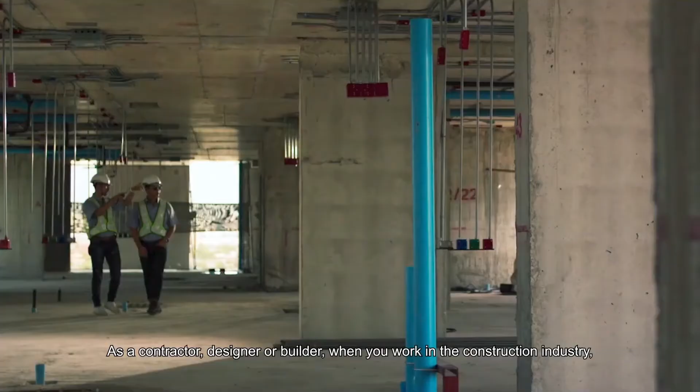When you look at the buildings that exist in today's world, what do you really see? The concrete, the stone, or a reflection of yourself? As a contractor, designer, or builder, when you work in the construction industry, you know you're out there creating something each and every day. Have you ever considered the influence your building is bringing to the people living there? Throughout the past several years, people have simply considered builders as carvers of stone, erectors of columns, or cutters of pieces of stained glass. But they are so much more than that.

Buildings affect the way we live our lives. They inspire us and help us decide where to live, how to live, and in some respects, they reflect who we are as a society. We shape buildings from the beginning. Thereafter, they shape us.

No one can deny that the impact of technology on architecture reflects every aspect of our lives. In this new digital era, we can rely on our past experiences while still starting to look at the world in a totally different way. We start to explore the way to better run a project, better use energy, better focus on design to create an interactive living environment, and better work with the creative path of prosperity for more people.

If you want to explore what the future will be like, come and join us for our Summer Summit. Share your passion for construction and get insight into the digital world. Because a better world starts here, with you.

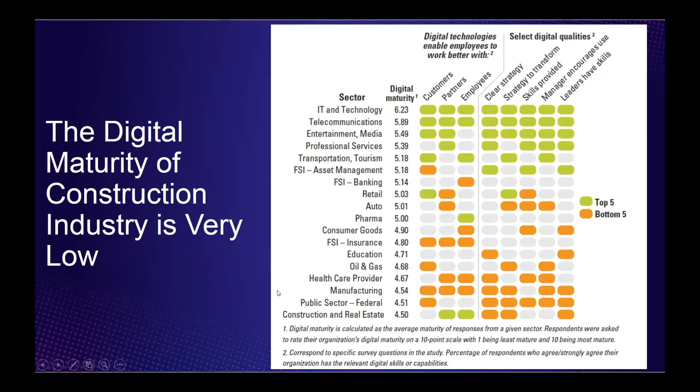That's a good question. Let's take a look at the other part of the survey.

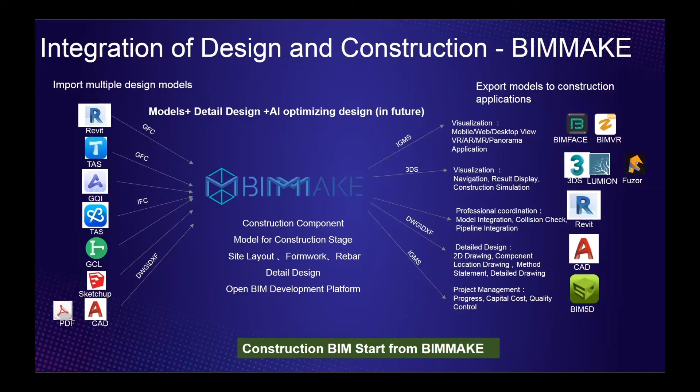So how could BIMMake play this role? Let's take a look at the architecture of BIMMake. For the platform level, BIMMake has BIM data standards, a graphics platform, and a BIM core modeling platform. For components, there are some very key components such as file import, file export, modeling for structure and architecture, model visualization, site modeling, and so on.

Based on this platform and these components, BIMMake has solutions for integrated steelwork, visualization and simulation of construction methods, and takeoff during construction. If we have complete construction models, that means we can get very accurate quantities of the building for each floor. Based on the quantities, we can make a reasonable plan for material, for people, and for machines.

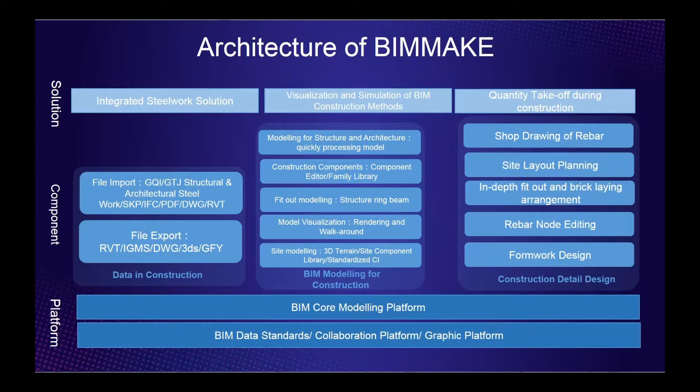So the second important thing is integration of project management and enterprise management into one system. For site management, we know there are some key elements, such as labor management, machinery, material management, methodology, and environment management. If we have digital technologies that can dynamically get the information of labor, machine, material, methodology, and environment, that means we can make a project management system that can easily and quickly get risk information, quality information, and progress information.

And if we have all of this information in real time, we can also transfer this information to the company level for the whole company, and we can have some program library and plan library.

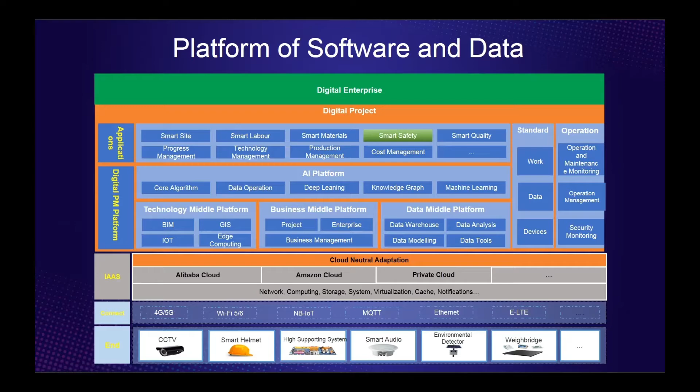For these new technologies, new platform, new methodologies, we have already used them for many projects. This is one sample project. The total construction area of this sample project is 150,000 square meters, 216 meters high.

We have every safety and quality issue in the data, in the system, so we can track the change of the data. This project has used our software for reporting, recording, and tracing the corrective action of construction quality and safety problems. The project manager told us this software doubles the efficiency of quality and safety management in this project compared to others.

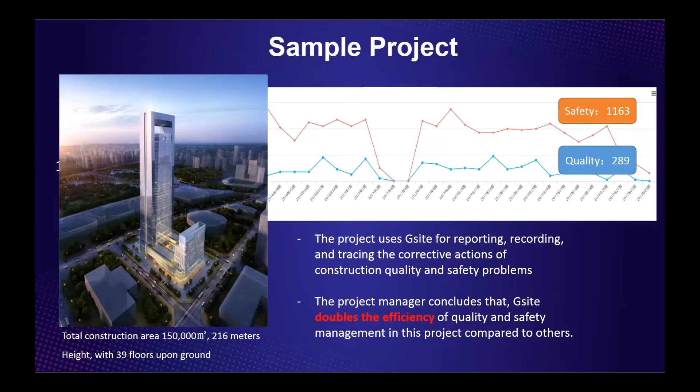The safety issues numbered 1,163, quality issues 289. This project involves 11 subcontractors and 47 users. So far, 91% of issues closed, and 80% of issues solved.

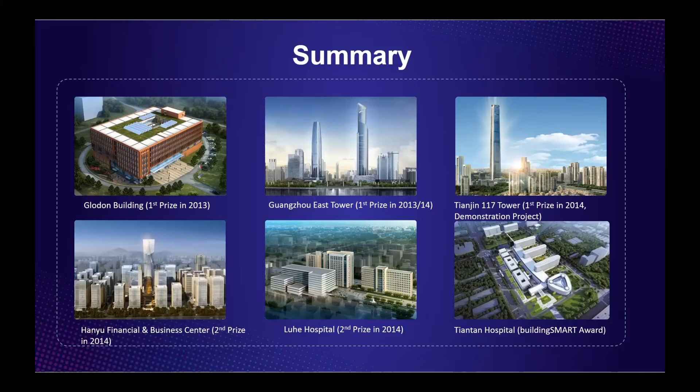Besides this sample project, our system has already been used for many other projects, such as our own Glodon office building, Guangzhou East Tower, the highest building in Guangzhou, the Tianjin 117 Tower, and a local hospital. This system has already been used for more than 20,000 projects, including houses, high buildings, airports, and others.

Digital transformation is not easy, but it's feasible. If we think of it as a system transformation, we need digital leadership. We need to figure out the strategy and use a digital building strategy to guide the transformation for our company. We focus on 3 parts: integrate design and construction to one system, integrate project management and enterprise management to one system, and integrate software and data to one platform. Based on this leadership strategy and key methods, we think digital transformation is achievable.

With intelligent architectural ideas, we are changing traditional concepts and redefining the relationship between human beings and buildings, creating intelligent cities.

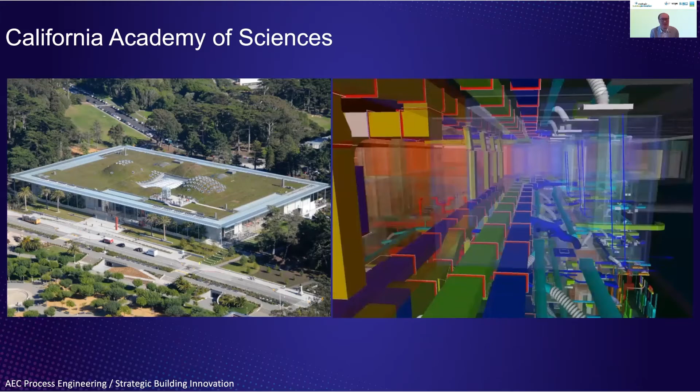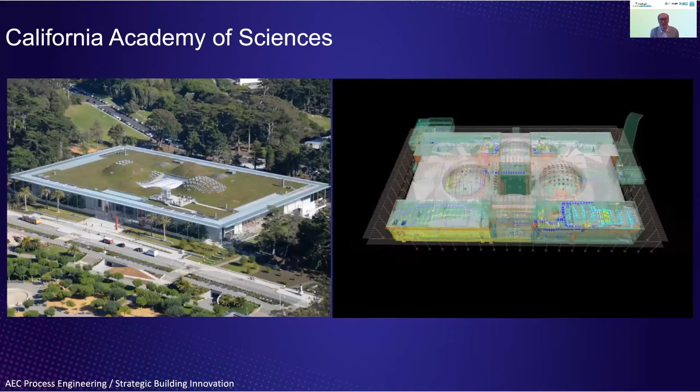Let me share some observations from the US, from Europe, and from the Americas. First, we've seen a lot of successful pilots. Almost 20 years ago, the California Academy of Sciences building in San Francisco was leveraging different forms of 3D, building information modeling, virtual design and construction, 4D and to a certain degree 5D, to create a project that would not have been possible without this technology. More importantly, the project turned out to be very successful in terms of being on time and truly realizing the vision that Renzo Piano, the architect, had generated.

Fast forward 10 to 15 years later, we've seen a similar vision realized by Apple, by Steve Jobs, and by Norman Foster and Partners at the Apple headquarters campus in Cupertino, California. All the best of the technology, from industrialized construction, prefabrication, pre-finished materials, are able to come together well, and at the same time the attention to detail is a very encouraging trend we can all learn from. Yet these are all very good single pilot, single successful projects.

What we've seen is that these are often important first steps to transform a company, to transform organizations, to transform a city, a country, and really the construction industry at large.

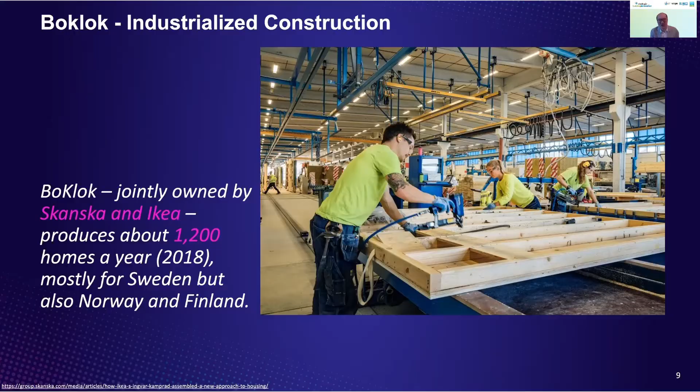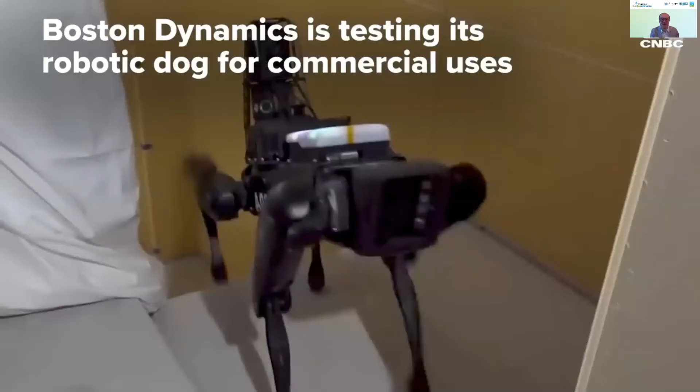A little more emerging now, coming back to Boston and the US, we've seen that Boston Dynamics is able to bring artificial intelligence and robotics, starting to pilot how this can be applied on our very complicated construction job sites. You can see that a robotic dog is able to perform basic navigation.

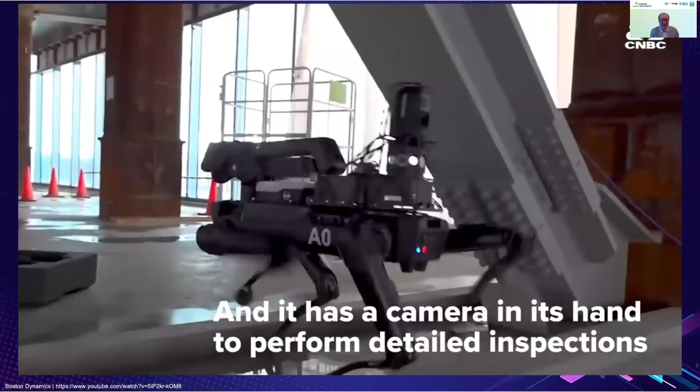They have a camera, and more recently we've seen Faro and Boston Dynamics partner together to put on a laser scanner. Traditionally you need a lot of labor and skilled professionals to set up a laser scanner, to set up the LiDAR approach to perform that. But now automation and robotics are able to start bringing some of this into construction with a different kind of fusion.

Just like IKEA and Skanska, we are now able to see Faro, a very traditional, very strong laser tracking and laser measurement, laser scanning company, being able to bring metrology in what Faro does with Boston Dynamics, which is about what the future can bring in terms of smarter, more digital job sites.

So far, for the last 10 minutes or so, I tend to focus on a lot of the leading examples of what some of the best examples are doing in the world in terms of construction, in terms of one-off projects, in terms of amazing new ventures and some very promising new technologies.

But just like running a marathon, we should not only focus on the front runner. We, the digital construction industry, should also focus on maybe the mediocre. Like myself, if I were to run a marathon, I may not even be running in the middle, I may be falling very far behind. Or as we know, sometimes running a marathon, not everybody can make it. They may get tired, they may get accidents, they may not have the full training or the full condition to do that.

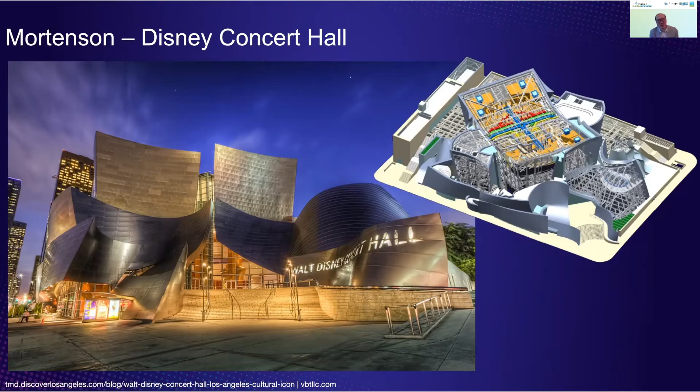So one example, this is Mortenson. They started their digital journey back in 2001 or so with the Disney Concert Hall. It's certainly another project that could not have been built without digital construction. And they continue to move on to say about 15 years later, up in Minnesota, they are able to leverage technologies like 4D, 5D, virtual design, virtual construction in a very successful construction and delivery of the US Bank Stadium.

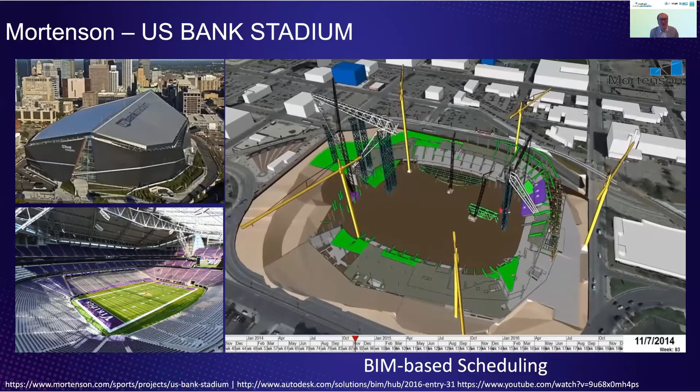Yet what is really important is that these are one-off projects. But Mortenson, back in 2014, was able to measure not only those special projects, but across the portfolio, how could they measure the effectiveness of digital construction? In this case, we saw that they were able to report 32 days reduction of construction schedule, 25% productivity increase,

2.95% construction cost reduction. These are what we mean by being able to measure ourselves so that we can make sure that we are not just trying to dash, but able to sustain a marathon.

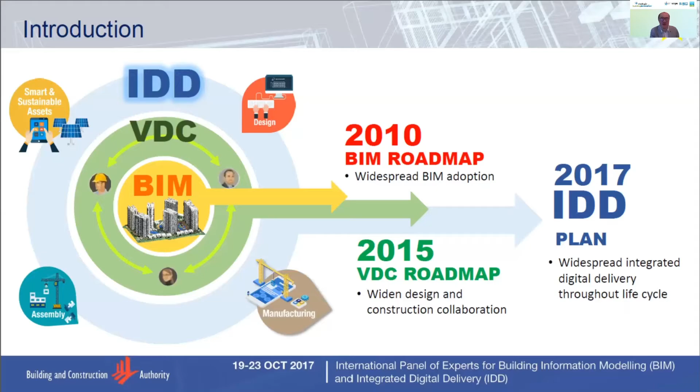We were also very fortunate to be working closely with Singapore over the years to bring VDC to hundreds of professionals in Singapore. Beyond that, by 2017 or so, Singapore began thinking about integration, delivery, and digitalization — that's the integrated digital delivery. That is really starting to think about delivery beyond just typical design and construction, into the full life cycle, thinking about how technology becomes a platform. No longer are we just dealing with one-off, closed technology, but how do we start to do it on a much broader scale? So here are some of such examples.

Over the years, we were able to invite Singapore government leaders and professionals to Stanford University, working with us to understand how we can bring some of the prefabrication mindset, how we can learn from manufacturing, lean planning, production planning, and be able to really bring them back into a good virtual design and construction.

We also, in return, work with all these professionals, launching classes of executive training, leadership and professional certification, and also spend time in Singapore working with specific project teams, understanding what are the metrics, as I mentioned a few minutes ago.

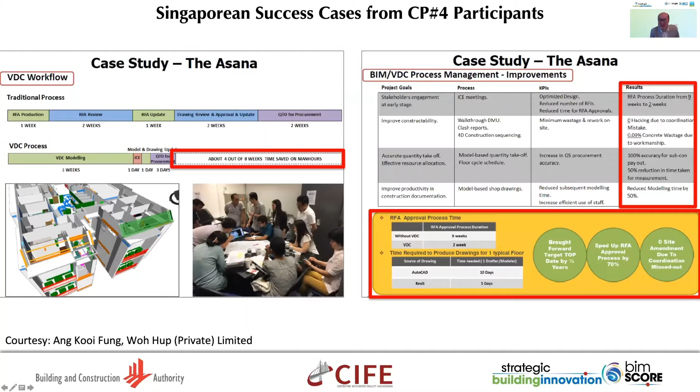You can see that they are able to report back on 70% approval, schedule improvements and able to save time. Whatever may take 8 weeks can now be cut in half. Wastage can now be reduced to 0.09%, and able to also focus on modeling time, accuracy improvement, and beyond.

And what we are now able to see is how this all comes together through the IDD framework. Another key concept we know in Singapore is design for manufacturing and assembly. It's about pre-finished, prefabricated volumetric construction.

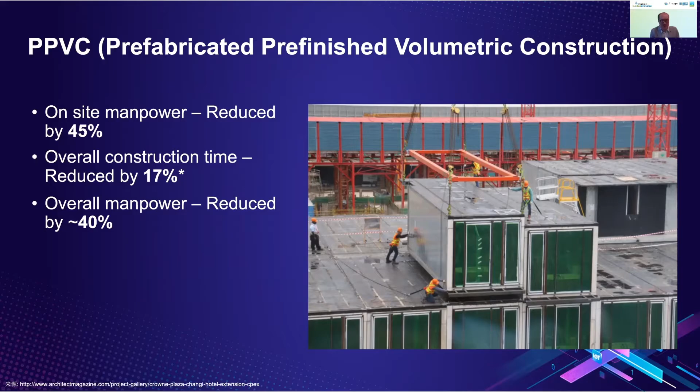Some good examples, like in the Changi Airport, Crowne Plaza Hotel, through the use of PPVC, Singapore is able to see 45% reduction of on-site manpower, 17% reduction of construction time, 40% of overall manpower reduction.

So that's exactly the kind of momentum we see, that having the government leadership and education, growing this way, you can really turn out to be something sustainable, like running a good long marathon. In a nearby city, Hong Kong, we have also seen Hong Kong getting local government policy address from the chief executive.

Whether you're talking about some of the top policy address back in 2017 or the top budget allocation back in 2018, the commitment in BIM was there.

And that played a tremendous role in making sure that BIM was not only a hobby, not only an elective, but just like what we see from years and years of local BIM awards, we have seen that the application of BIM can really flourish, whether we are talking about infrastructure projects, public housing projects, and anything else in between.

And over the years, we have also been helping the Hong Kong Local BIM Awards to benchmark how Hong Kong is doing relative to Asia Pacific, relative to other parts of China, relative to the global construction world. And you can see that we can call Hong Kong, in general, to be in about a middle range of typical practice and advanced practice.

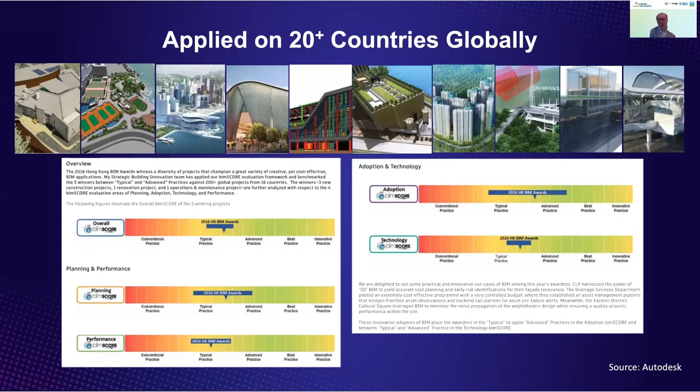There is certainly a lot that Hong Kong can learn from what is truly innovative. And by doing that, we also want to highlight that sometimes just talking about the award is like going to the Oscars. We talk about some of the awards, we can show you some of the best director's cut film, but we often may be forgetting about the chaos, the reality of what is happening behind the scenes.

So what is important is to go deeper into what actually happened behind the scene. Coming back to Hong Kong, my team and I were able to work with the Hong Kong Construction Industry Council. For about a year, we were able to go deeper to not only look at the award winners - yes, they are doing amazing things - but what about hundreds and hundreds of other companies?

In this study, we were able to get 734 responses coming from government departments, design teams, owners, operators, developers, main contractors, subcontractors, and anybody in between.

Similar to the global survey we mentioned a few minutes ago, we were trying to understand what may be the distribution of leaders, adopters, and laggards in Hong Kong, and what may be the motivation.

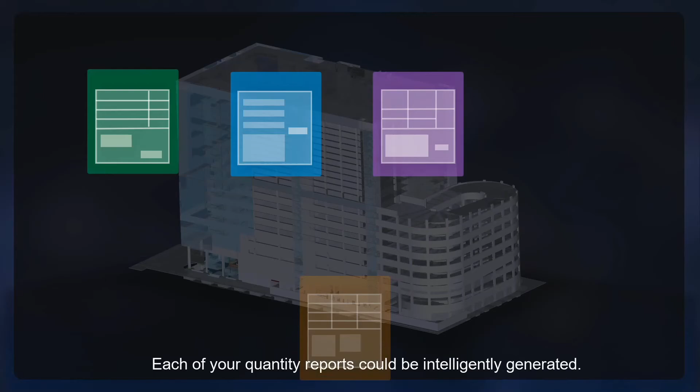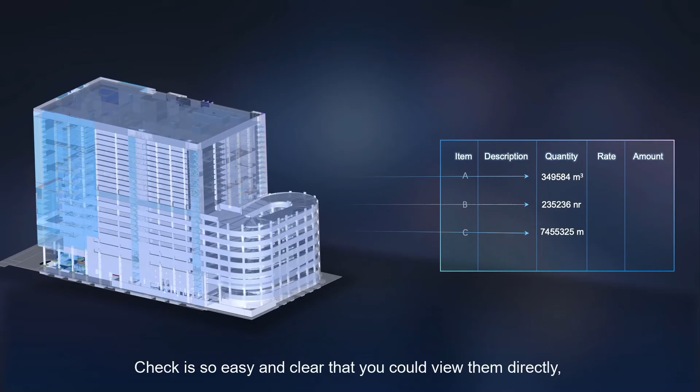Just imagine, each of your projects could be automatically taken off. Each of your quantity reports could be intelligently generated. Each quantity of your BQ could be traced back to your source. Check is so easy and clear that you could view them directly without any redundant calculation. We present you Cubicost. With Cubicost, you could obtain dimensions on drawings intelligently and generate BIM models accordingly.

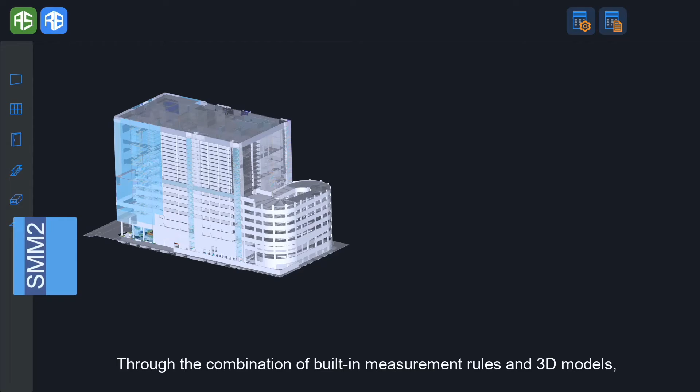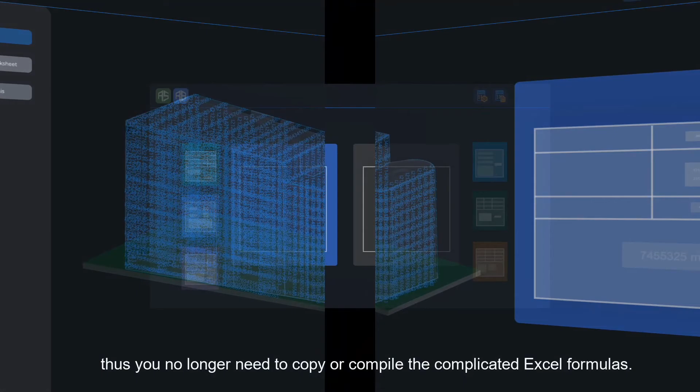You could possess multiple standard methods of measurement around the world. Through the combination of built-in measurement rules and 3D models, you could calculate the quantities automatically. Instead of repeated manual quantity takeoff, you could obtain the quantities rapidly with just a few steps. In addition, Cubicost provides preset report formats that you use most frequently and fills data in them automatically. Thus, you no longer need to copy or compile complicated Excel formulas. Meanwhile, you could customize the required report formats on your own.

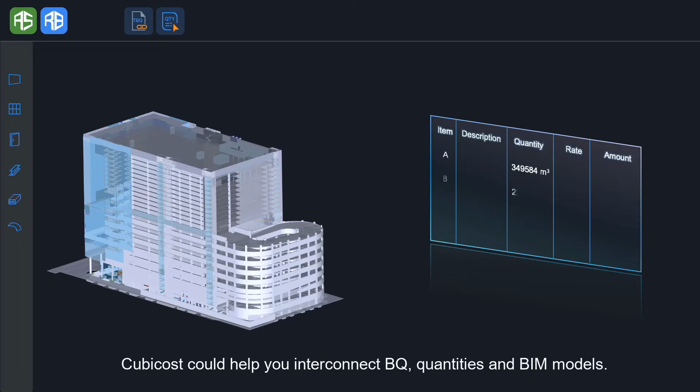After you fill quantities in BQ, Cubicost could help you interconnect BQ, quantities, and BIM models. You could easily find out where each quantity item in BQ is from and where it goes. This is Cubicost Takeoff Solution, your intelligent, visual, and interconnected whole process takeoff solution.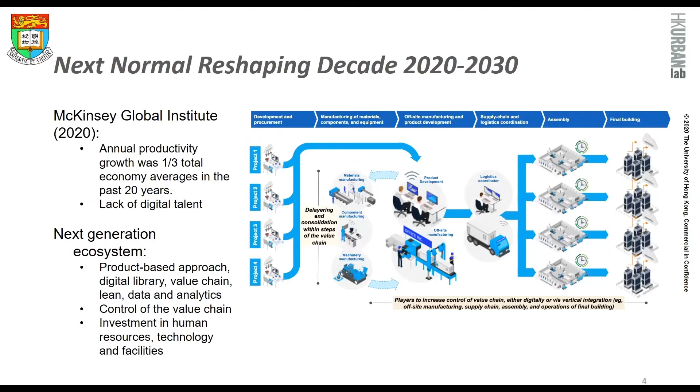Back to basics, what are our real challenges if we talk about digitalization? If we talk about a building as a product, there are so many parameters inside, including the location, the level, the space issue, what system we're talking about, what asset we're referring to for the whole life cycle. We're talking about so many different types of data, and whether it's an open standard, proprietary or non-proprietary format, this mix of standards gives us a headache. That problem moving into digital actually makes it worse, and in the end we're really scratching our heads on how we synchronize the real asset and the digital asset.

We end up having lots of tagging issues when we come into operation, lots of uncertainty when we look for data. We don't know whether the data is trustworthy, whether it's been approved by someone else in design stage or construction stage. Lots of problems actually come out. So as a digital talent, how can you actually help the industry drive this process, make it streamline and better, and optimize your productivity at the same time?

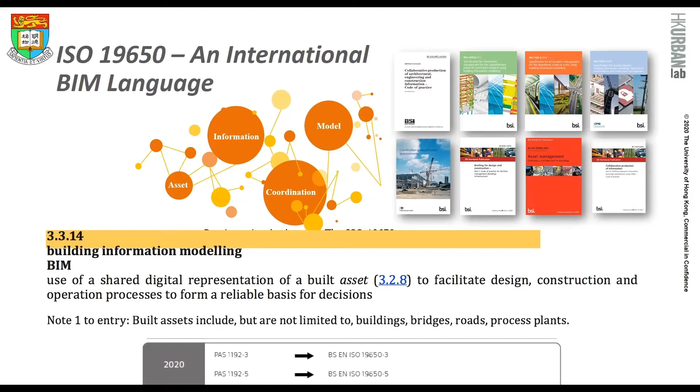So within ISO 19650, there's a keyword called CDE. Another term I want you to take with you: common data environment, or sometimes you may hear single source of information. There's always one source of data you can refer to, and it's trustworthy, high quality, and high value. But this is not a new term.

CDE actually started very early, back in the level 2 standard, 1192 in the UK. The 2007 version already talked about CDE. They defined CDE as a repository, or sometimes you may call it extranet, electronic database. It already existed. So in the CAD world, we already wanted something single source.

It needs to be centralized. We always want to refer to one type of data, one set of data. So recently, BIM level 2 defined this as a single source of information. And the CDE can be a project server, extranet, or a file-based retrieval system.

Very recently, we talk about decentralizing our data. Now we are not talking about just one database, but lots of databases, each with its own centralized system. So the SSOI, single source of information, could be multiple.

So in the ISO, or the most recent 1192 version, it talks about the CDE as a central repository where all the construction project information is housed. It could not just be model, it could be all the documentation, graphical model, and non-graphical model.

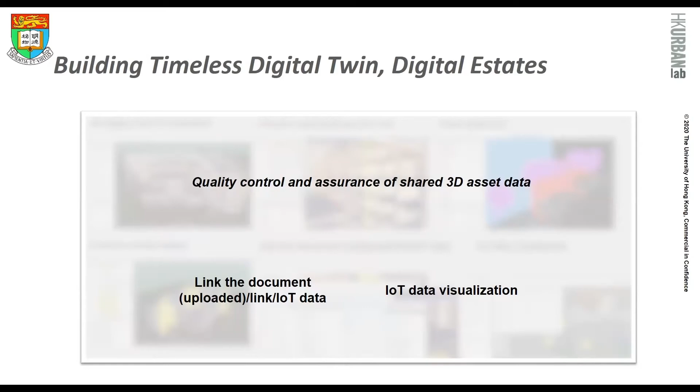So to wrap up, how do we actually cultivate our talent for the future? Bear in mind, digital is timeless. From Albert Einstein: not everything that can be counted counts, and not everything that counts can be counted. We don't need everything physical to go digital.

As a digital talent, you think about it - what workflow are you talking about? What solution can you purchase or create and develop to help this workflow be digitized and synchronized with the physical workflow? This is very important. But now you've got all the gears around you that make your job easy. As long as you get recognized, I'm sure more and more good digital talent can be provided for our sector.

So hopefully beyond 2035, 2045, we will really have a very mature and timeless digital world that helps to boost our sector in the future.

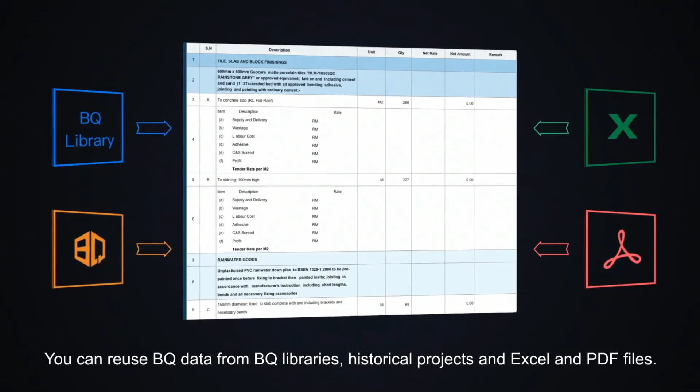Welcome to TBQ, the digital cost management solution for you. TBQ has a professional system for compiling BQ, with various types of professional built-in bills, elements, BQ, and prices for you to choose. You can reuse BQ data from BQ libraries, historical projects, and Excel and PDF files. TBQ has a professional and intelligent system for generating tender documents. It splits pages intelligently and generates pages with bill items for collection and summary. TBQ can generate complex tender documents such as preliminaries, provisional sum, and prime cost. Contractors can submit electronic tenders directly. Intelligent, efficient, and accurate - it supports reusing pricing data from build-up, historical projects, and Excel files. It supports quick price build-up, analysis, and adjustment. Consultants can evaluate tenders electronically. TBQ is a professional platform for electronic tendering - professional, efficient, and accurate.

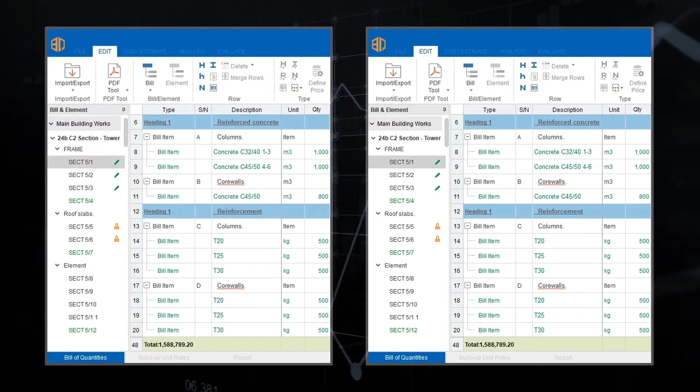It has a visible and shareable system for collaboration. It supports build-up collaboration between bills and elements, and offers seamless collaboration between quantities and prices. It supports collaboration between pricing and review. It is a digital cost management solution for enterprises. TBQ enables enterprises to accumulate, apply, and analyze data. This is Glodon TBQ, your digital cost management solution to make your cost management more efficient, intelligent, and professional.

Okay, thank you everybody. First of all, I want to thank Glodon for giving us the opportunity for this 11th Digital Building Annual Summit 2020. We do hope we can contribute to this event. But before I start with the presentation, I would like to play a short video about Hutama Karya so everybody can know about Hutama Karya. So please enjoy the video.

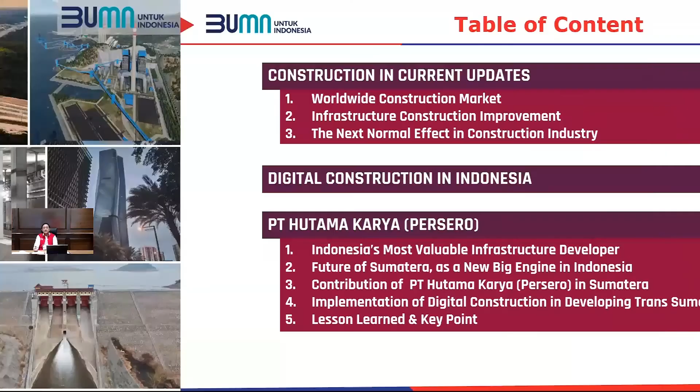This is the cover of our presentation, showing some projects we have completed in Hutama Karya. Today's presentation will talk about construction in current updates, and then digital construction in Indonesia. Lastly, I would like to explain what Hutama Karya does in digital transformation.

If we talk about global spending in the construction industry, construction-related spending accounts for 13% of global GDP, affecting the ecosystem significantly. Every year there is 3% annual growth in construction spending, though in 2020 there was a slight decrease due to COVID happening around the world.

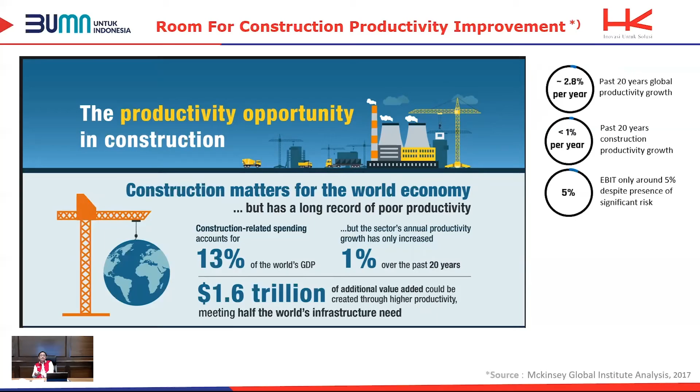This slide talks about the room for construction productivity improvement. This is interesting because construction has a long record of poor productivity. Over the past 20 years, construction productivity growth was only 1% per year, smaller than the average productivity growth of 2.8% per year. Another challenge is that earning before interest and tax is only around 5%, despite significant risk present in the industry. So the construction industry, which accounts for 13% of the world's GDP, has a lot of room for improvement.

So where can we make improvements? According to McKinsey, there are 7 areas that can boost sector productivity by 50 to 60%. First is reshape regulation, which relates to government. Second is rewire contracts, since contracts in construction normally only cover what benefits the owner. Third is rethink the design, which can have a lot of impact on improvement. Fourth is improve procurement and supply chain.

The fifth is improve on-site execution. The sixth is infuse technology and innovation. And the last is reskill workers. If the construction industry can address these areas together, there's an opportunity to increase productivity by 50 to 60%, and possibly boost productivity 5 to 10 times if we move parts of the industry toward a manufacturing-style production system.

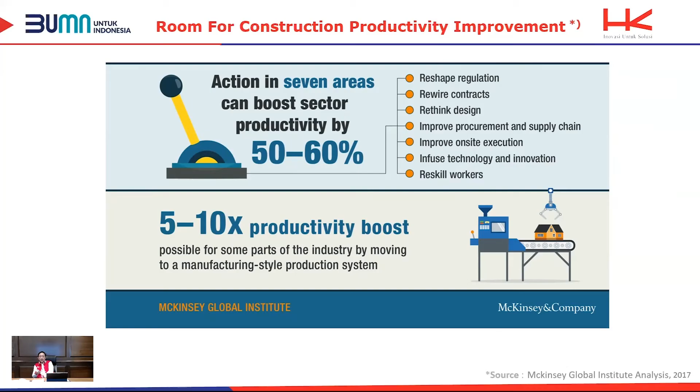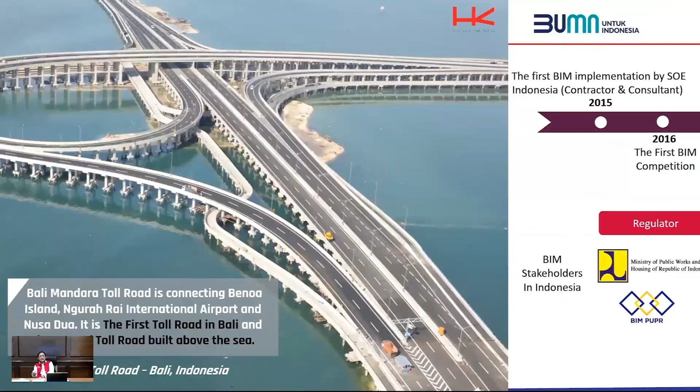This slide talks about the building information modeling journey in Indonesia. The first BIM implementation by a state-owned enterprise in Indonesia was in 2015. In 2017, there was a government initiative on BIM. The next year, 2018, the first BIM regulation by the Indonesian government started to be implemented. Of course, some companies did partnerships with global BIM players, such as Glodon.

In 2019, a BIM National Strategic Workshop was conducted by the Ministry of National Development Planning. The regulator is the Ministry of Public Works and Housing of the Republic of Indonesia, as the BIM stakeholder in Indonesia. There are also a lot of general contractors, state-owned enterprises like Hutama Karya, Wijaya Karya, PP, and other private construction companies, as well as professional associations, designers and consultants. So all of them implement BIM in Indonesia.

On the project side, Indonesia has also implemented digital construction in many sectors, and Hutama Karya is contributing here too. If you take a look at the legend, this data is taken from the Ministry of Public Works and our internal source. In Sumatra Island, there are a lot of projects conducted by Hutama Karya and other contractors, also in Java, in part in Kalimantan, Sulawesi, and some in the eastern part of Indonesia, like in Papua.

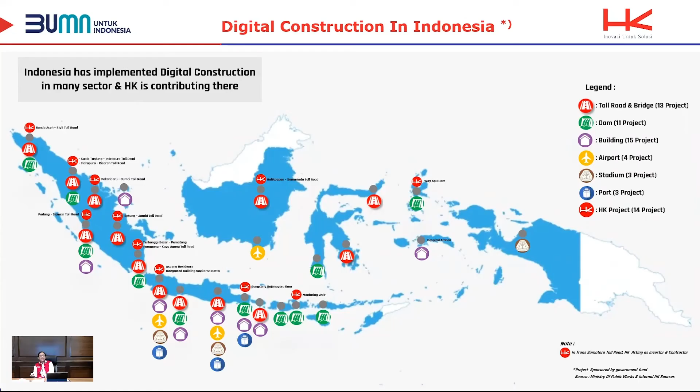We are owned 100% by the government of Indonesia. Our portfolio is divided into two sectors. The first part is about the toll road in Trans Sumatra. Below the toll road, we have toll road development, toll road construction, and toll road operation.

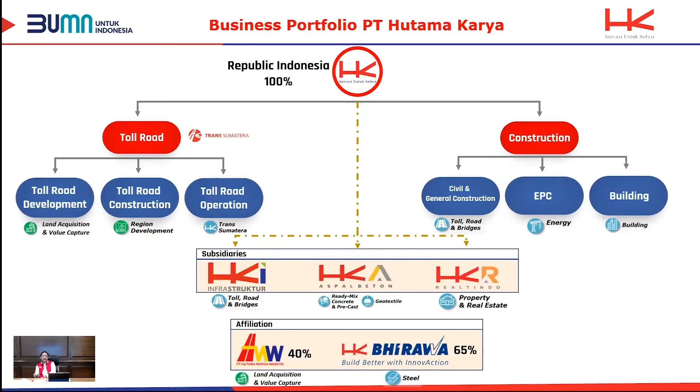Our business line is almost similar, but we also have some investment in Trans Sumatra in steel, land acquisition and value capture, and region development. So maybe perhaps we want to also do some investment - we'll be glad to cooperate with you. We also have property and realty.

In industry and EPC, we do energy and water projects, and we also do power plants. In infrastructure, we do utilities, port, airport, and heavy equipment projects as well.

Talking about the toll road, I'll explain a little bit about the future of Sumatra, because this is also one of the biggest tasks that Hutama Karya will undertake.

So we will complete the Sumatra Island with the economic corridor from Bakauheni until Banda Aceh. Hutama Karya has been assigned by the Indonesian government to build the mega project Trans Sumatra Toll Road, with a length of more than 2,700 kilometers and total investment of more than 33 billion.

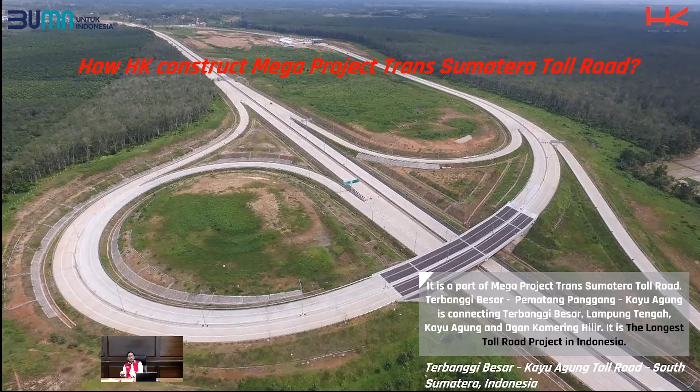This slide shows how Hutama Karya constructs the mega project Trans Sumatra Toll Road. This is part of the mega project - Terbanggi Besar and Pematang Panggang Kayu Agung connecting Lampung Tengah. This is the longest toll road project in Indonesia in Sumatra, and this part has already been completed.

Using digital construction in the mega project Trans Sumatra Toll Road, we divided our process into three parts: first pre-construction, then construction itself, and post-construction. This is the phase that we follow for this project.

In the pre-construction process, we do digital survey, select the alignment, do the modeling, and check elevation and slope analysis. After all the analysis is completed, we start construction. We also do traffic simulation analysis, fatigue test, and driving simulation to make sure the toll road and everything will be designed perfectly.

In the construction process, there's material takeoff. We also check clash analysis to make sure the existing condition matches what we are thinking, so there's no surprise on site. If you don't check carefully, there's a possibility the design won't match the real condition.

After we complete the construction, in post-construction we do operation control room work, maintenance, and we have mobile access for operation and maintenance of our toll road project.

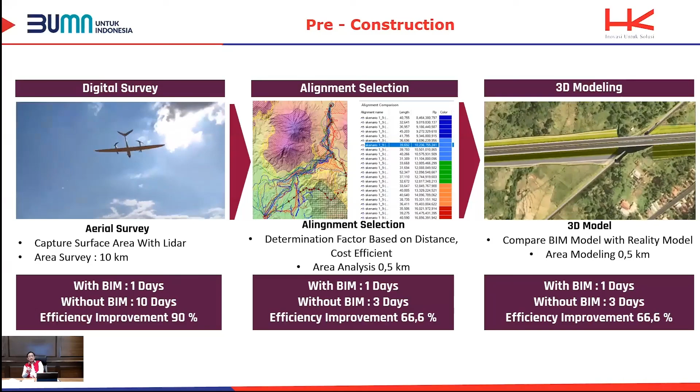The next step is selecting the alignment. We determine the factor based on distance and cost efficiency, with area analysis around 0.5 kilometers. Normally with BIM this takes only 1 day; without BIM it takes more - efficiency improvement is more than 60%, 66.6% for alignment selection.

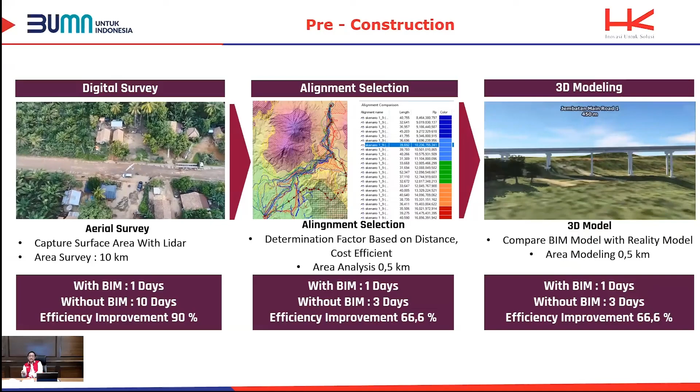The next step is 3D modeling - we compare the BIM model with the reality model, and this is also a lot of improvement. New 3D modeling takes 3 days, but with BIM it takes only 1 day, so efficiency improvement is also more than 60%. This is during the pre-construction process.

The next step in pre-construction is elevation and slope analysis. We analyze the rain catchment area, so in the rainy season we make sure the toll road doesn't block the water area. We analyze rain volume and make sure everything is done according to our analysis.

This is also the same - there's a lot of improvement we can achieve, more than 60%.

After completing the elevation and slope analysis, we also do traffic simulation analysis, analyzing daily traffic volume and traffic density. The last step is fatigue test and driving simulation, making sure drivers using this toll road have good conditions and enjoy the toll road we make. This is the pre-construction phase.

During construction, just before we start, we do clash analysis - we superimpose the BIM model with the real environment. What we take from the digital survey we plot with the 3D model, and make sure all the design matches the site condition, so for example a pier won't end up in the middle of a river.

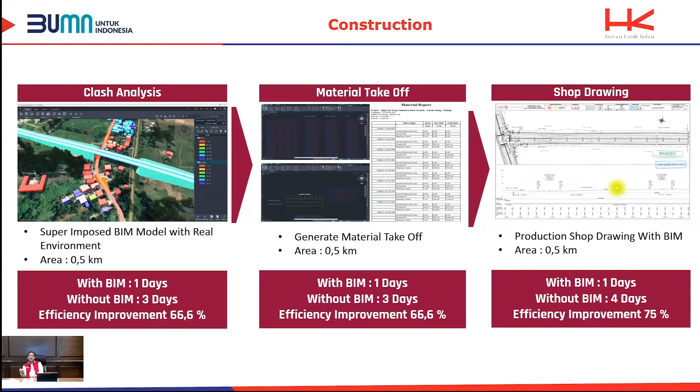So this is the clash analysis, and a lot of improvement we got from this. Also in the construction process, we do material takeoff, so there is a material report we can generate. And also in the last process, we create shop drawings, with a lot of improvement we can do there too, with efficiency improvement around 75%.

After we complete the toll road, when we do operation and maintenance in the post-construction process, there is also a process with the operation control room, where we measure real-time dashboard monitoring so we know the traffic and can see what's happening on the toll road in real time. We also do maintenance process and asset management, with mobile access using CCTV for traffic monitoring. This is the post-construction implementation in our toll road project.

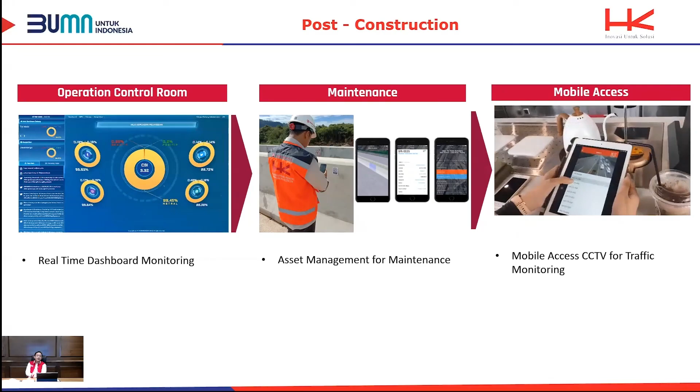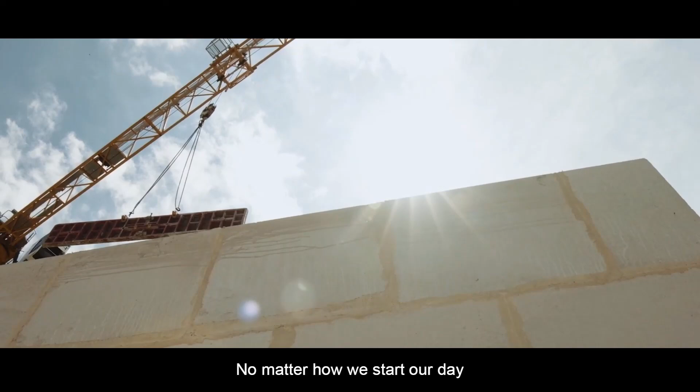No matter how we start our day, it seems that we are rushing around doing the same old things and suffering from work inefficiency. Sometimes we feel helpless in managing our tasks overall.

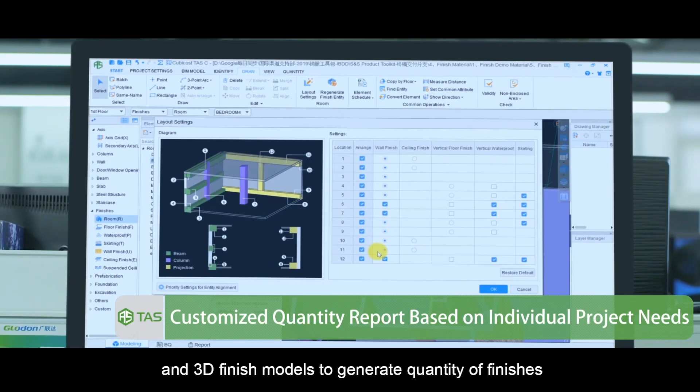Recognizing 2D drawings and 3D finish models to generate quantity of finishes with the help of flexible layout setting. Auto report generation with high flexibility of report styles allows various customization for project and company needs, enabling effective collaboration with multiple team members on multiple models such as building components, finishes, and steel structure.

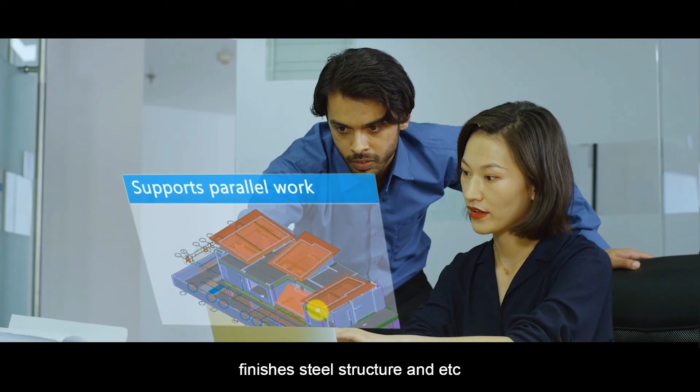TRB has built-in standards of ACI, BS, IS, and Eurocode, providing faster and more accurate measurements through automation. TRB recognizes CAD and PDF drawings for better calculation adjustments, including rebar length, laying area, spacing, and much more.

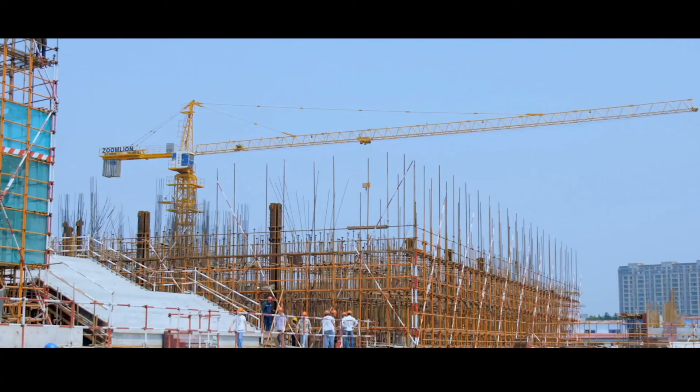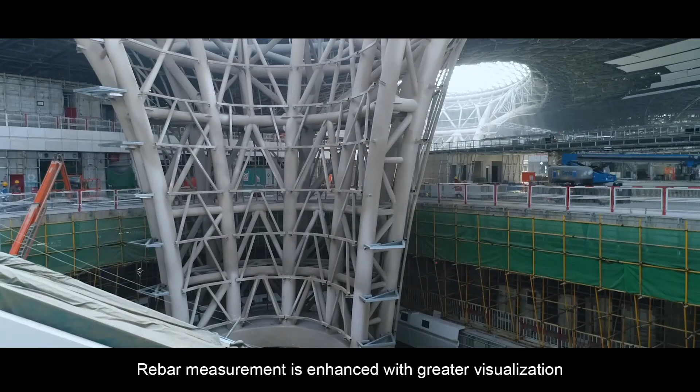Aided with 3D technology, TRB enables users to tackle changes quickly and update project quantities accordingly. Rebar measurement is enhanced with greater visualization in 3D graphics as well as rebar layout arrangements, utilizing quantities, reports, and 3D technology to quickly identify potential errors in measurements.

TBQ supports identifying PDF and Excel files. Build-up rate is composed by different methods, allowing detailed adjustments on each cost factor.

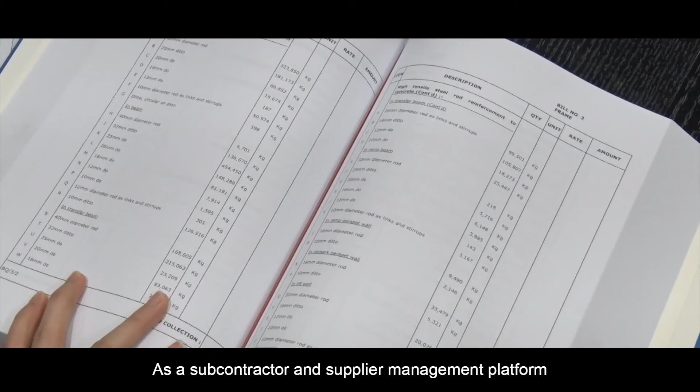As a subcontractor and supplier management platform, TBQ provides better intelligent analysis in terms of importing quotations and auto-generating tender evaluation reports, compiling various quotations from project to project, creating a price database for all future projects.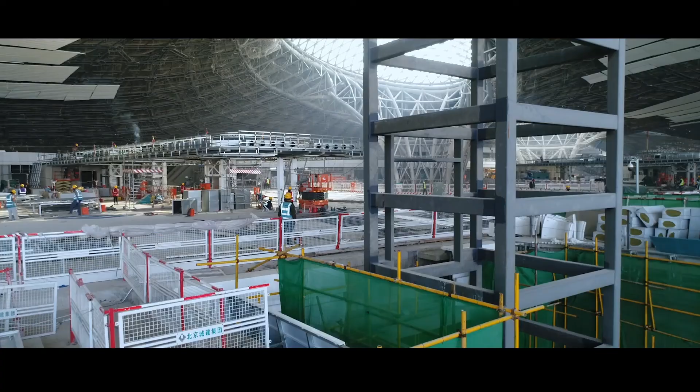It integrates project model quantities with cost information to materialize 5D BIM application, embedded with tender BQ templates as well as allowing flexible editing, and speedily generates tender documents to achieve greater success with better work efficiency and management convenience.